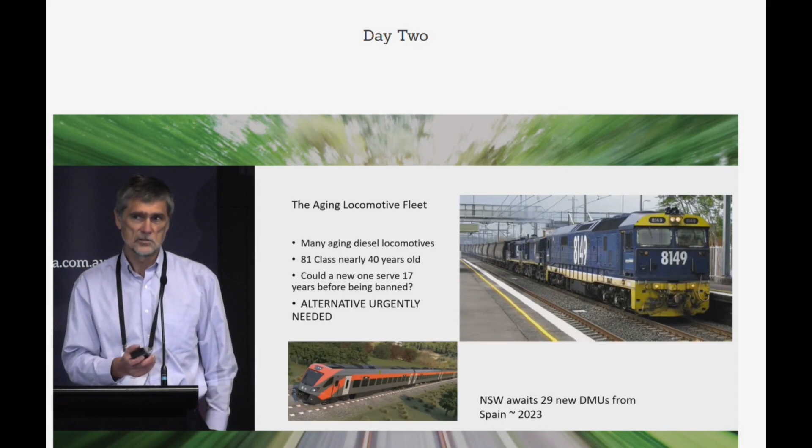And if you decide, I'm going to order a new, more efficient loco so it's got lower emissions, and you order it tomorrow, how long will it be in service before it's banned? We urgently need an alternative. And I just put a photo there of the new regional rail trains which New South Wales has ordered from Spain. The first one should be arriving next year. There's 29 of them. They're diesel. That could be an interesting problem.

But there's a more immediate threat than even legislation and international commitments, and that's, I guess, due to private enterprise. We've seen a total revolution in electric cars in the last few years. Well, the revolution's happening now. Like 10 years ago, an electric car was a kind of a rich boy's toy, but now we're seeing electric cars with a range of 300 to 500 kilometres. The price is coming down. In Europe, EV sales are already 17% of all new cars and 14% in China, and we are about to see a flood of moderately priced electric cars coming from China in the next year or so.

A few years ago, people would have said, and I would have said, that a long-distance electric truck wasn't really possible. Elon Musk has been promising his semi since 2017, I think, but it does look like it's about to go into production now, maybe late this year, early next year, and he's promising a range of 500 miles or 800 kilometres, which is the distance to Melbourne. So we could be seeing a truck that can go from Sydney to Melbourne, all electric, no emissions, very soon.

Now, even if that happens, obviously we're not going to change all trucks overnight. It might take 10 years before we see a significant number of trucks, or maybe half the fleet in 10 years' time by 2032. But it just turns the whole equation upside down. We've been saying that rail is the most efficient, therefore it's the lowest emission form of transport. That argument's turned on its head if trucks are zero emissions.

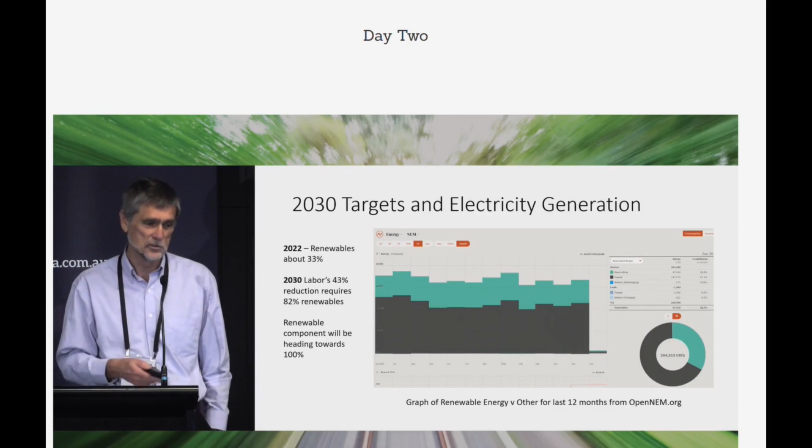In rail, we've obviously got electrification. That's the obvious way of getting to zero emissions. The trouble with electrification, as has been mentioned before, is it's expensive. It costs about $2.5–3 million a kilometre to electrify. And that cost is only justified where you've got high traffic volumes.

So in Australia, all the capital cities have electrified rail systems. In Europe and in Japan, you find even between the major cities, it's electrified, because you've got trains going past every few minutes, and so that justifies the cost. But when you've got lines where trains only go past every few hours, like in most of Australia outside the cities, you can't really justify that.

For example, Canberra, that's a national capital. It only gets 3 trains a day, and these are little trains, just 3 carriages. Plus there's 1 freight train a week, which carries Canberra's only export. So there's not much to keep train spotters busy in Canberra. On these sort of branch lines where you've got infrequent traffic, at the moment diesel's the only solution.

So what are the alternatives to diesel? Well, there's batteries, and you've seen electric cars. We're now talking 500 kilometre range. On trains, batteries are still pretty heavy, and axle loads and space mean that range is kept down to around 100 kilometres. So this is a Bombardier Talent battery electric multiple unit. It operates with a pantograph like a normal EMU, and it can go around 100 kilometres on batteries. That just entered service in January. They're only just starting to come into service now.

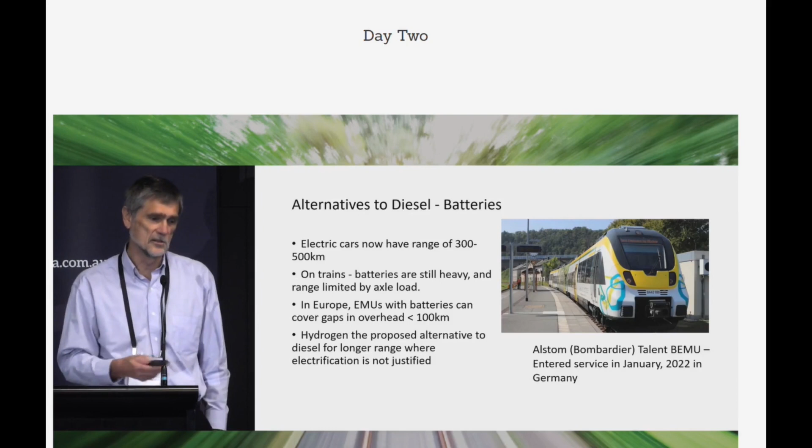So what do you do when you want to go more than 100 kilometres? That's where hydrogen is proposed. It's talked about as being the best alternative for longer distances. And why hydrogen? Well, hydrogen fuel cells are favoured because they are zero emissions, no CO2, no NOx. Efficiency is roughly twice that of internal combustion engines. Hydrogen can be made by electrolysis from water using renewable energy.

The expectation is green hydrogen will become cheaper. The energy density is really high. It's over 3 times that of diesel, which is why they use it for rocket fuel. Its energy density is 200 times that of batteries, but there is some fine print if you look there. And there are some obstacles to the use of hydrogen.

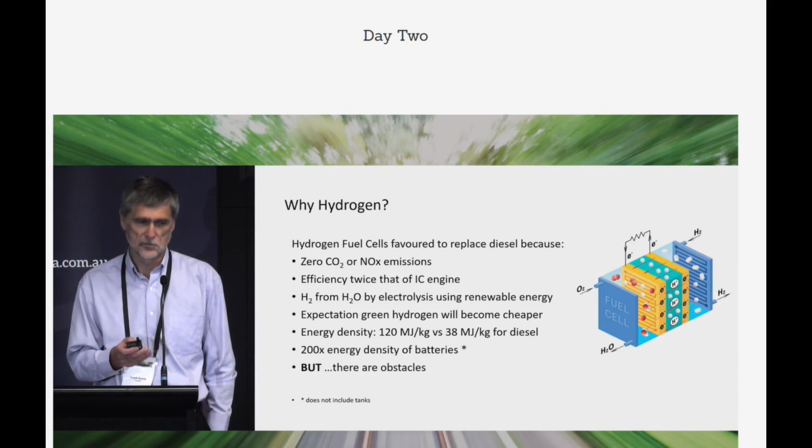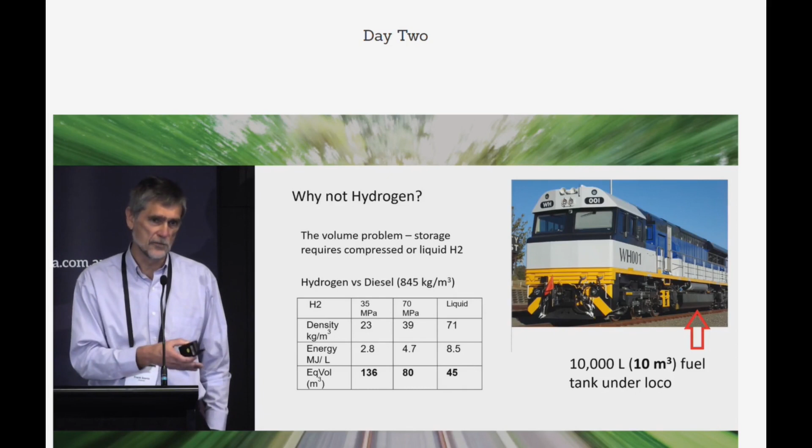And if you're wondering why 35 megapascals and 70 megapascals, which is 350 bar or 700 bar, they're kind of industry standards, and it's 5,000 and 10,000 psi in the old measure. So why not compressed hydrogen? We're talking about pressures which are extremely high. We use compressed air on trains for the brakes and so on. Here we're talking about pressures which are 100 times greater. And we do have the odd air leak on trains at the moment.

35 megapascals requires thick-walled, small diameter, carbon fibre reinforced vessels. You can't have a big diameter vessel. What they're typically getting is about 6% weight for weight. So the weight of hydrogen in the tank is 6% the weight of the tank. For example, the Toyota Mirai, its tanks weigh 88 kilograms and hold 5 kilograms of hydrogen. So once you take the tank into account, and this is a carbon fibre tank, it's really only about 6 times that of batteries.

So on a loco, that loco in the picture before, that fuel tank made of sheet steel weighs under 3 tonnes. It holds nearly 3 times its weight in fuel. If you had the equivalent energy in hydrogen, that tank would be 47 tonnes, which is almost half the weight of the loco.

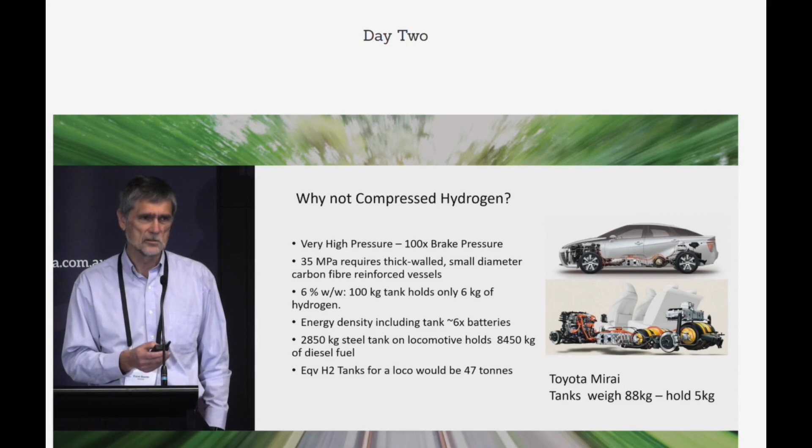One of the things is with these very high pressures, these tanks, because they fatigue, you have to throw them away after about 8 or 10 years. Just thinking in the recycling economy, you could actually use those tanks maybe for storing carbon dioxide or something.

Next thing is the difficulty in distribution. So a road tanker of diesel fuel will haul 30,000 litres or more. A steel tube trailer, as Colin was talking about, the trailer weighs 27 tonnes and carries about 300 kilograms of hydrogen. That's at 180 bar.

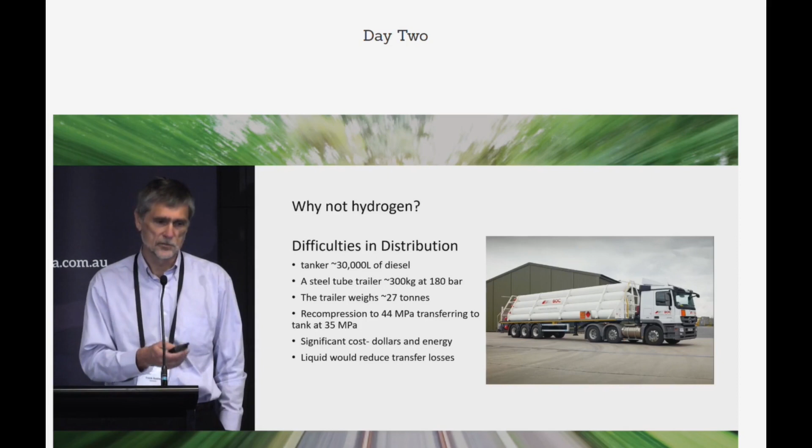Plus, every time you move the hydrogen from one tank to another, you have to recompress it. And the energy of recompression can be up to 10% of the energy of the hydrogen. So there's a significant cost in dollars and energy just in moving hydrogen around to where you want it. And liquid hydrogen does actually solve some of those problems because it's a lot denser. So why not liquid hydrogen?

Well, hydrogen is liquid at 20 degrees above absolute zero. That's minus 253 degrees C. So you can see in that picture the guy refueling his truck. You know he's not using liquid hydrogen because he's not wearing gloves. So a tank to hold liquid hydrogen has to be very much insulated, like a vacuum flask with a double wall, a vacuum in between. And even so, the gas is going to slowly boil off. So you have to vent the tank, and you're probably losing about 1% of your hydrogen per day being vented.

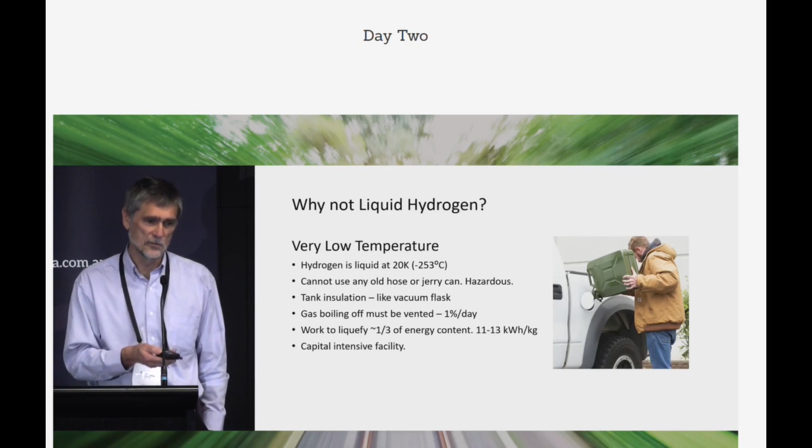The work to liquefy, it's roughly a third of the energy in the hydrogen. So that's a big upfront loss of energy. Although once you've got it as a liquid, it's easier to move it around. And you do need a fairly capital-intensive facility to produce liquid hydrogen to get it down to that temperature.

And then there's efficiency. Although fuel cells are very efficient compared to an internal combustion engine, they're really still only around 50%. Efficiency decreases with load. So if you look on that graph, the green line in the middle, you can see it's up above 50% down at the low end, but when you're starting to get up to maximum power, the efficiency is dropping off and it's down to maybe 42% or so, and that's the overall efficiency because you have to take into account cooling and the rest of it.

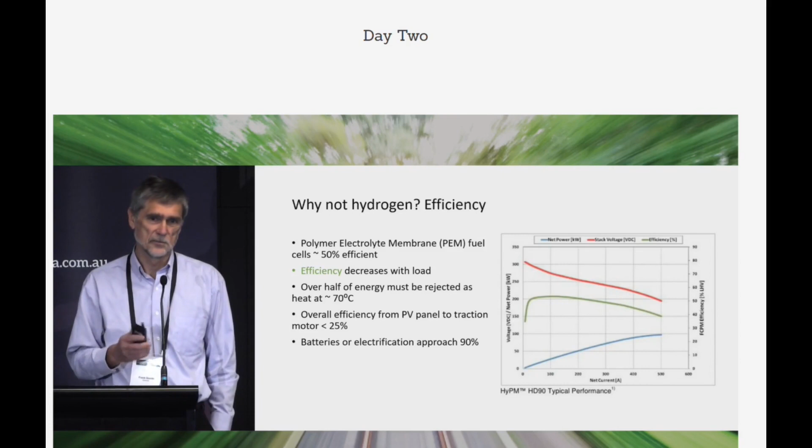When you look at the overall cycle from your solar panel all the way down to your traction motor on a train, you're really only about 25% efficient. Whereas when you put the power into batteries, you get about 90% of it back.

And yet, in spite of all those problems, the technology does exist. The Alstom Coradia iLint has been running, well, two prototypes running in Germany since 2018. And just 2 weeks ago, I believe, a fleet of 12 went into service in Lower Saxony in Germany. These replace DMUs, that's diesel multiple units. So this train is based on a diesel multiple unit, but with the diesel and other traction equipment replaced.

So you've got an engine which is 335 kilowatts, replaced with a 200 kilowatt fuel cell, and batteries that give 600 kilowatts peak power. So the way it works is the fuel cells are giving a constant recharge, and the batteries are giving you high power when you need it. And the range is, I've said 800 kilometres, but apparently they're getting 1,000 kilometres out of it. And the amount of hydrogen you can store on board is the limitation.

And there are at least a dozen projects around the world where other people are trying to do the same thing. Siemens, Hitachi, others are following basically the same concept.

And the iLint, you can see on the left, the fuel cells are down one end. There's a whole lot of fans there because half the energy that's in the hydrogen goes out as heat, so 200 kilowatts of heat to be rejected. And because fuel cells operate at a relatively low temperature, you're rejecting heat at about 70 degrees, so you do need a lot of cooling area. And the middle part of the roof is all taken up with these small diameter tanks.

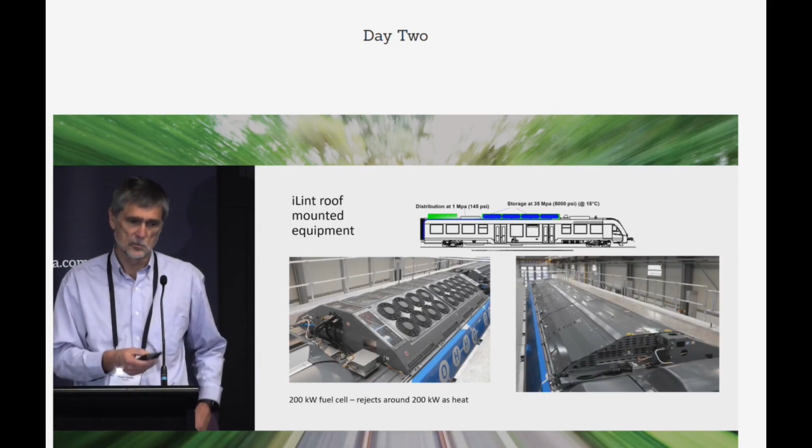So could hydrogen replace DMUs in Australia? Victoria has a very large DMU fleet, the VLocities, there's over 100 of them. New South Wales is about half the number, serving the Hunter Valley and the Southern Highlands.

Some of your longer trips, like Sydney to Canberra, are 320 kilometres, and Melbourne to Albury is also 320 kilometres. The iLint could easily do that, being refuelled just at the one end in the capital city. For longer distances, like Sydney to Brisbane or Sydney to Melbourne, they're just under 1,000 kilometres. You're pushing it, it would probably just about make it. But in Australia, high-speed trains run slowly. So these trains could do it.

If you wanted to go faster, like just to sustain about 130 kilometres per hour or so, you would need twice the number of fuel cells, because you're not just drawing on the battery, you've got to generate the power continuously. And if you want to go from 130 to 200 kilometres per hour, because it's a square law with speed, you need double again. So you're talking about 4 times the number of fuel cells, which means a train of a different configuration. By the way, the picture is a New South Wales Xplorer. That's the kind of train that runs to Canberra at the moment, but with 3 carriages.

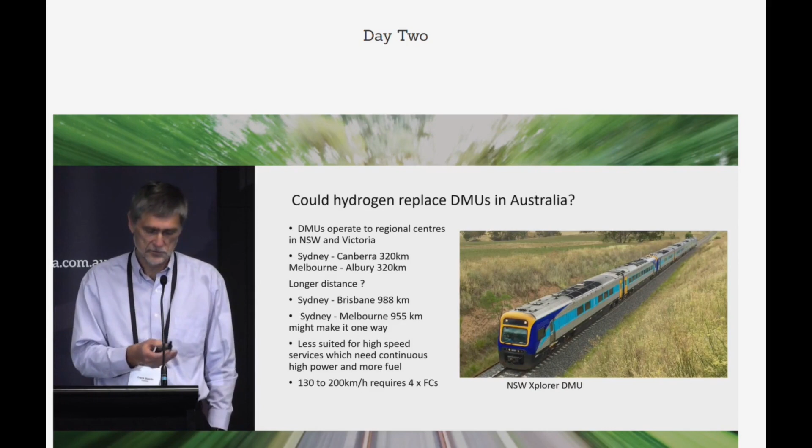It's one thing to refuel a prototype. You can have a tanker and a portable unit to pump it up. If you want to run a fleet, like they're now doing in Lower Saxony in Germany, this picture on the right is the refueling station at, I think it's pronounced Bremerförde in Lower Saxony, which just opened last month, I believe. I think it's the 24th of August, I saw in the press.

So if you look at what's in the picture, on the left-hand side, there are 64 of these torpedo-type vessels, which altogether hold 1.8 tonnes of hydrogen at 500 bar. It's kept at constant pressure, and the big tanks on the right, they're big diameter, but they're holding oil, which is used to displace the hydrogen, so you keep the tanks at a constant pressure, so you can just push it straight into the train when it comes in, and the pressure doesn't drop as you fill it.

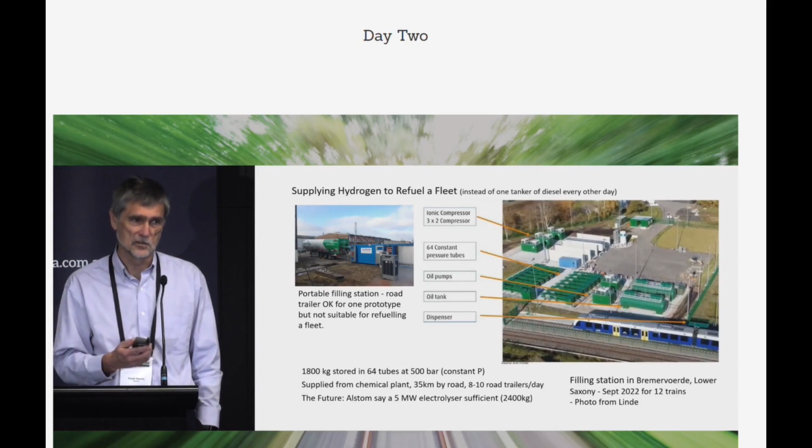And the hydrogen comes from a chemical plant about 35 kilometres away by road. So you've got 8 to 10 road trailer tankers coming in per day. And bear in mind, this is replacing the equivalent of 1 tanker of diesel fuel coming every second day. So this is a way to put 15 extra trucks on the road.

What about locomotive hauled trains? Diesel electric locos haul bulk goods like coal, minerals, grain, and some long-distance intermodal freight. And I'm particularly interested in intermodal because that's what we're trying to grow. Between Melbourne and Sydney, when I joined the rail industry back in the 1980s, it was falling, but still about 25% of freight between Sydney and Melbourne went by rail. It's now less than 1%. It's just tacked onto a train running to Brisbane. And the question is, will hydrogen help us reverse this trend to road transport?

A mainline loco needs about 3,000 kilowatts of continuous power, and you could do that with fuel cells. So I looked at the figures for a 3,000 tonne train running from Sydney to Melbourne, hauled by 2 locomotives. If it's diesel, and these are just some simulations I did, say 5,650 litres of fuel for a loco. If it's a hybrid, if you combine it with a battery, you could get that down to about 3,900. And if it's hydrogen, you need about 1,150 kilograms.

And I calculated the CO2 for each. For the hydrogen one, even if the hydrogen's coming from natural gas, and at the moment nearly all hydrogen is made by reforming natural gas, there is actually still a CO2 advantage. But if it was renewable, made with an electrolyser, of course it'd be 0.

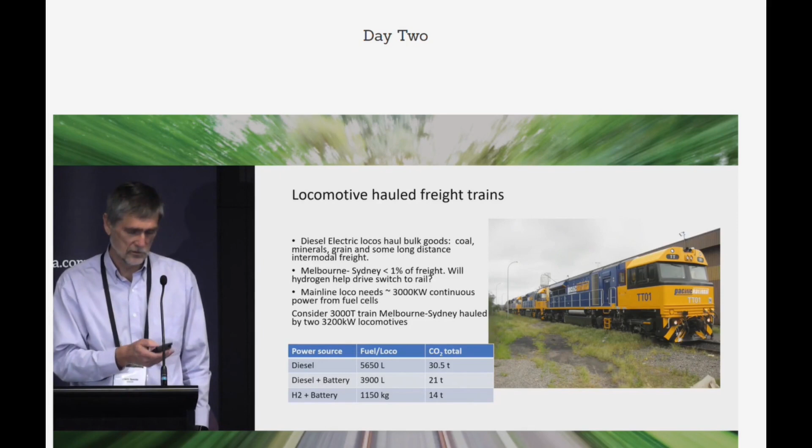You could just about get the 58, well, you need 59 cubic metres of hydrogen compressed at 35 megapascals. And these would have to be carbon fibre, not these old pipes. Each train would need 2 of these wagons, like 1 per loco as a minimum. It might even be a bit more to get from Melbourne to Sydney.

But then think about the logistics of supplying the hydrogen to this train. You would need 8 of those truck trailers to get the hydrogen. So if they come in sequentially, it's going to take you 8 hours probably, filling it at 5 kilograms a minute. So you're going to take 8 hours. Or you could have one of those facilities like at Bremerförde. That's just to refuel 1 train.

And if we're going to replace all the trucks between Sydney and Melbourne, you're going to need 10 trains a day running each direction. So you'll need 10 of those, a facility 10 times the size of that one. And the compression energy is not insignificant. To fill the hydrogen for one loco, you need 4 megawatt hours.

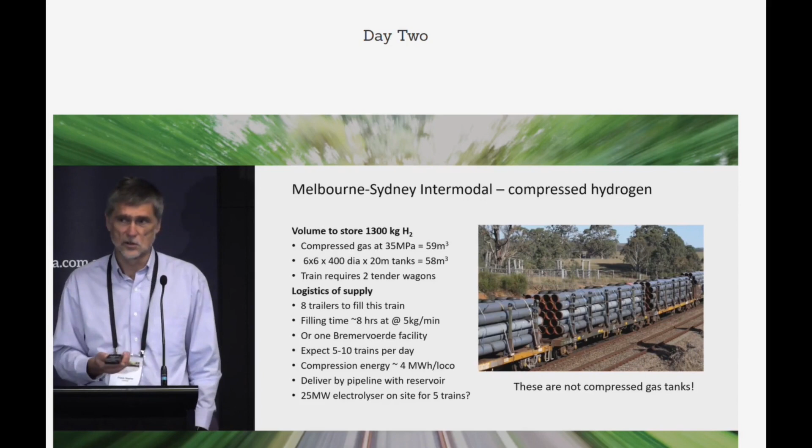It'd be good if you could deliver it by a pipeline from a reservoir somewhere, rather than trucking it in. In fact, not only good, you have to. Or you could have a 25 megawatt electrolyser on site. That would generate enough for five trains.

Or you could look at liquid hydrogen. So the 1,300 kilograms, that's about 18,300 litres. You still probably wouldn't fit it on a loco because it's not a rectangular box like in the photo. You need a big round vessel, double walls, insulated. So you're probably going to need a tanker.

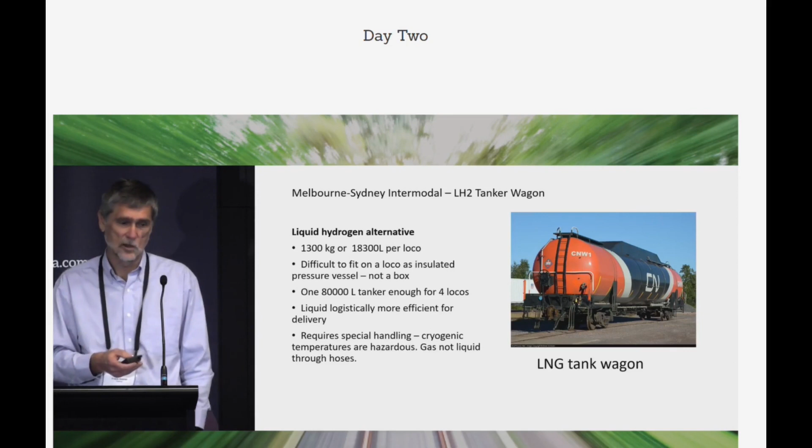So this picture here is actually of an LNG tank wagon, and that's got plenty of volume. So in fact, you could fit the fuel for 4 locos, or 2 locos that would run all the way from Melbourne to Brisbane. So yeah, making it liquid is a bit more practical in that sense. But liquid hydrogen does require special handling. It's a cryogenic, and it's at a horrendously low temperature. You can't push that through any old hose.

Long distance freight trains: rail is still competitive on the really long distance routes. So I've already mentioned Melbourne to Brisbane. You need about 12,000 litres of diesel per loco. But one tanker of liquid hydrogen would easily do 2 locos. But compressed gas, you'd need 2 flat wagons of those pipes per loco to do it, which is getting a bit impractical.

On the really long distance routes like Adelaide to Perth or up to Darwin, they already take a tanker with them. So if you look in this photo, it's not a very good angle, but behind the locos you can see the white tanks there. They take the diesel with them, so you don't have to stop to fill it up in the middle of the Nullarbor. You notice that black stuff coming out the top.

That's carbon. That's all right, because it's carbon dioxide which causes global warming. This blocks the sun, so it's fine.

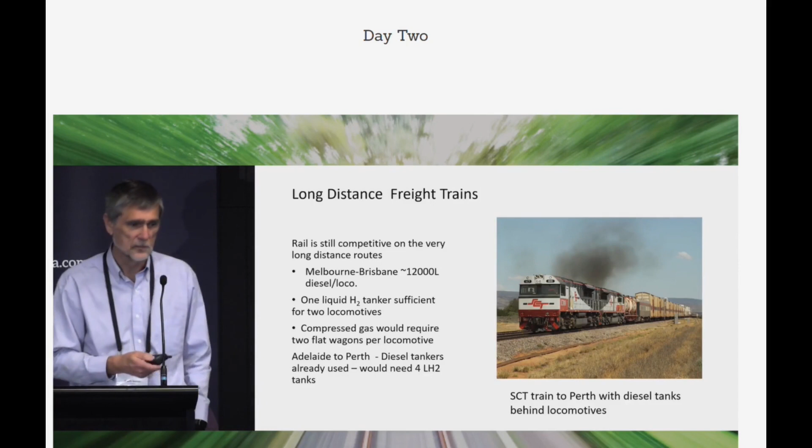It's interesting comparing liquid hydrogen to LNG. About 10 years ago in the US, there was a lot of interest in LNG and natural gas as a fuel, because at the time it was about 20% the price of diesel, and it's lower emissions too. There's a lot of research, but it went nowhere, and only one operator, as far as I know, has really adopted any sort of natural gas, using LNG, and that's Florida East Coast.

They've converted 24 locos. So this tank here, you can see, is a double wall vessel with a vacuum gap in between. It's built on a crash-resistant frame. The LNG has to be vaporised before you transfer it to the loco, because you don't want this cryogenic fluid going through rubber hoses. And that's what all that pipe work is in the left-hand photo. They take the radiator water from the loco back there and heat it up, so it's vaporised.

But LNG is pretty controversial in the US because of the risk of this acronym, BLEVE: a boiling liquid expanding vapour explosion. And there's been some terrible ones, like in Cleveland, Ohio, back in 1944, an LNG tank ruptured, the liquid flowed into the sewers, then it boiled and blew up, and over 200 people were killed.

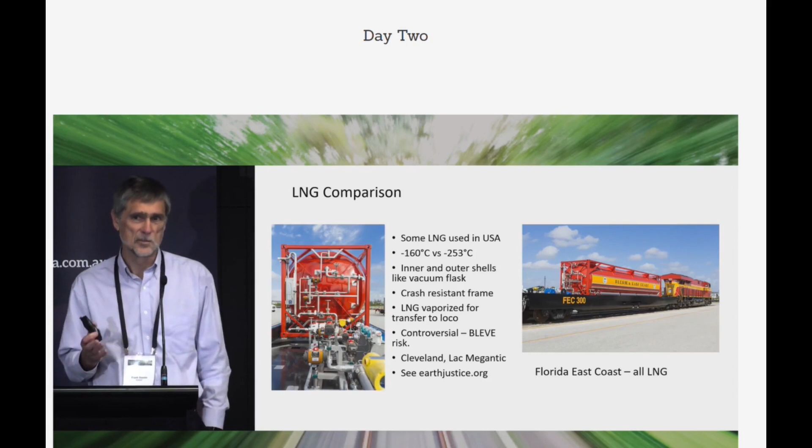They say that an LNG train with 22 tanks has the explosive equivalent to the Hiroshima bomb. And they're just waiting to be able to say something about a hydrogen bomb, I can tell you.

Is there a way of safely storing hydrogen at a better density than we've got at the moment? And there is one. It's very counterintuitive. But if you fill your tank with metal powder first, you can get more hydrogen in. That's because it goes in between the atoms, so it's solid state storage. And it is safe because it's slow to go in, but it's slow to come out. So even if you rupture your tank, it's not going to come flowing out.

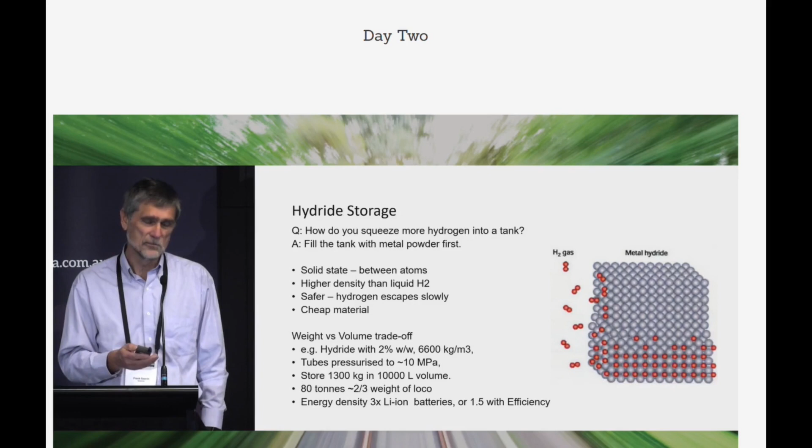And the material is relatively cheap, but there is a weight versus volume trade-off. So one particular hydride I looked at, which works at room temperature, it's iron and nickel, and it stores about 2% by weight. So suddenly you're back to a heavy storage again. Like you've got your volume down to something which is manageable, but you're not much better than batteries in terms of energy and weight.

And then there's ammonia. Ammonia is hydrogen joined to a nitrogen atom. It's a carbon-free fuel. Liquefied ammonia stores more hydrogen than hydrogen does, which is a bit odd. Counterintuitive. That's by volume, not by weight. Ammonia is made by the Haber-Bosch process, but it could be made from green hydrogen. It liquefies at minus 33 degrees, which just requires normal refrigeration. It's not down near absolute zero. The cycle energy, it does use energy, but it's similar to liquid hydrogen.

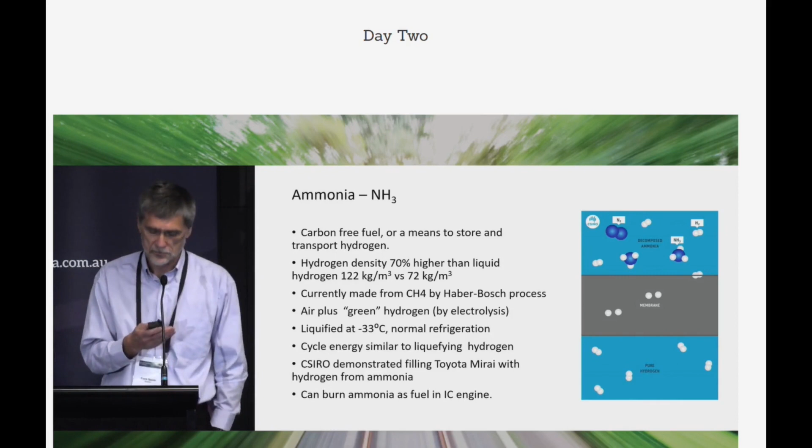And the CSIRO, a couple of years ago, demonstrated that they could fill a Toyota Mirai with hydrogen being made from ammonia, in real time. The conversion was happening as you were filling the car. So that would be a way of storing and moving hydrogen around. Or you can actually burn it as fuel.

Ammonia can be used to fuel a diesel engine. Problem is it's got very poor auto-ignitability. So generally people will use diesel as a pilot fuel, and then you can burn the ammonia. It does produce high NOx though, so you need to have after treatment, which is a bit of a problem. And any unburnt ammonia in the exhaust is toxic.

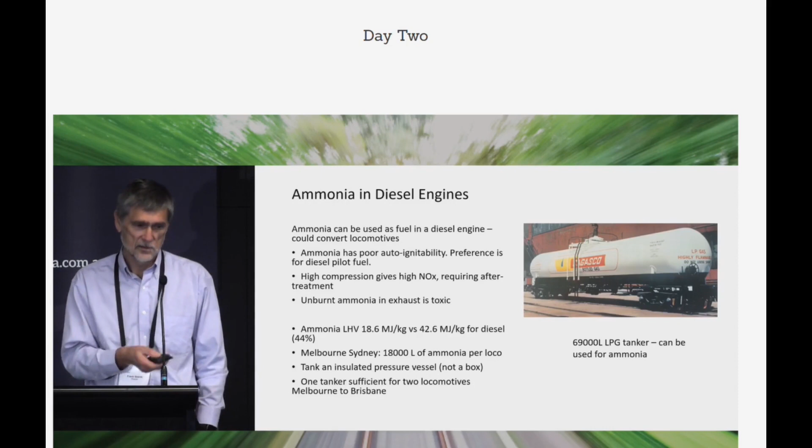So ammonia has less than half the energy of diesel, so you do need to carry more around. And again, if it's refrigerated, you probably need a tanker rather than storing it on the loco. This tanker here, you can use LPG. This is not LNG, LPG, liquid petroleum gas. Those tankers are around. One of those would take 2 locos from Melbourne to Brisbane.

Will hydrogen be cheap and green? You've got to consider the cost. At the moment, grey hydrogen is about the same price as steak per kilogram. Producing it, you get about 6 kilograms of CO2 for every kilogram of hydrogen. So it's not that green. The hope is that green hydrogen made by electrolyzers will be cheap and abundant.

But the reality today, back in January, Australia exported its first shipload of liquid hydrogen to Japan. It was made by gasifying brown coal. Then it was taken by road to Port Hastings down on Mornington Peninsula and liquefied and sent off to Japan. So there's no carbon capture and storage. So as of today, it's not very green.

So the conclusion, can hydrogen reverse the shift to the road? Well, a technical solution does exist for regional DMUs. High-speed passenger trains, it's going to be more difficult. Freight trains will require tender wagons of some sort. Neither compressed gas nor liquid hydrogen are easy solutions. But I think ammonia or hydrides may be the way forward.

And I expect there'll be a decade of experimentation and development, and I'm sure some of the hurdles will be overcome, but it's not ready today. And it's all contingent on there being cheap hydrogen from renewables, which may not happen till who knows when. And I think they'll be too late to reverse a shift to road. So my takeaway is I think we have to squeeze everything we can out of electrification and batteries starting today.